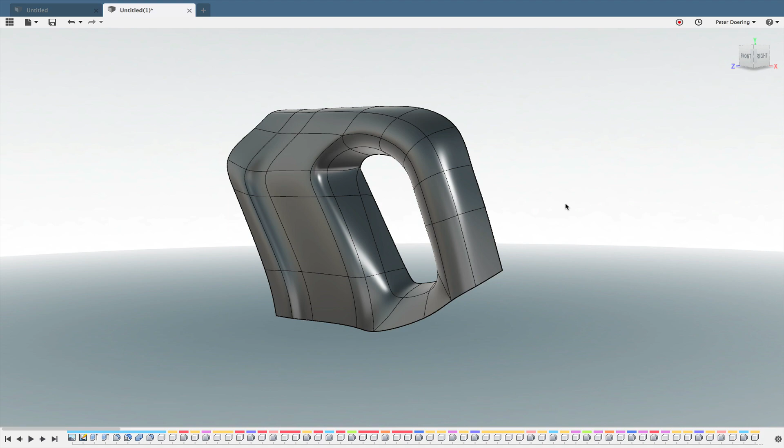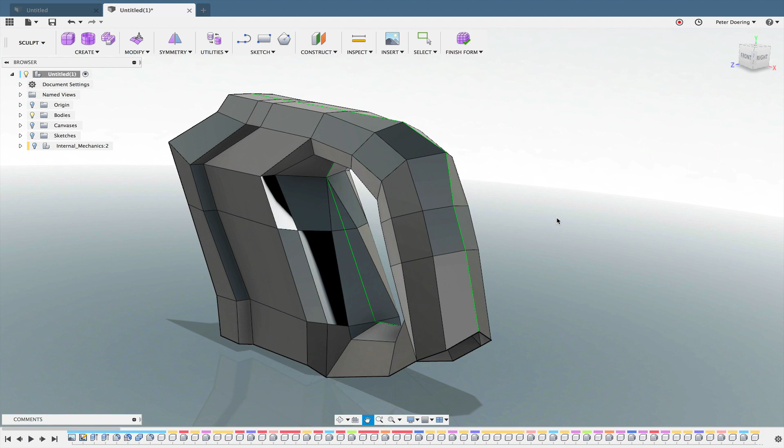The user that provided this model on the Fusion 360 forum says that he applied the mirror duplicate, and it turned all boxy. So the question is, of course, why is that? And the experienced user already knows why.

First of all, there's actually nothing wrong with it looking boxy, because it's simply a view mode. This shows you the layout of the control vertices. And when it's smooth, it shows you the surface structure it actually converts into when you finish the form.

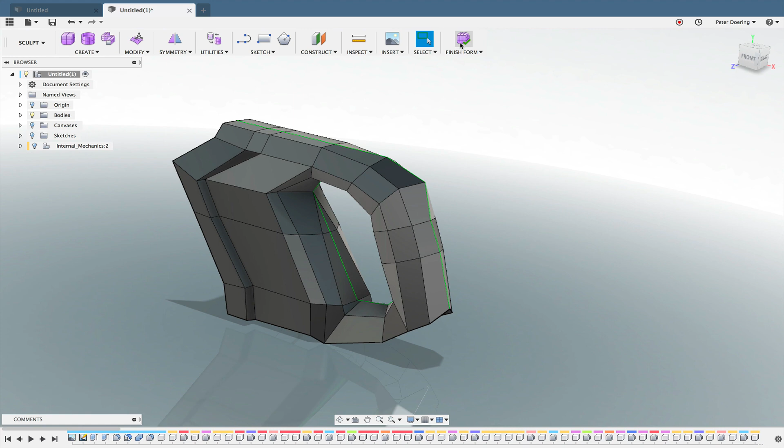But in this case, we couldn't actually finish the form because Fusion 360 would complain, as it does here. It says there's something wrong with the topology. And yes, there certainly is. So let's return and explain these view modes.

You should actually model, I'd say, at least 30% in box view mode and not in smooth view mode. This is just one way to get it. While you're modeling, usually with edit form enabled, those three view modes are also here. So while you are modifying your geometry, you can click on either of those. This is a mixed form, but we'll get to that in a moment, hopefully.

So this is in box view mode. Why is it? Let's try to switch it to smooth. It's enabled, but it doesn't do it. So the reason for that is that there is a triangle here.

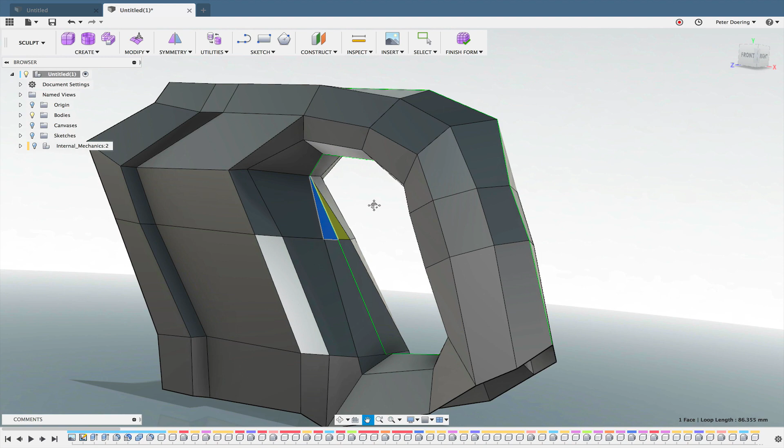If we delete it, it automatically goes back to smooth because it can convert it now. But obviously there is a hole here. So we can try to just fill that with a nice quad face, right? We don't want any triangles in our T-splines. 1, 2, 3, 4. Accept it, and there it converts into a smooth model.

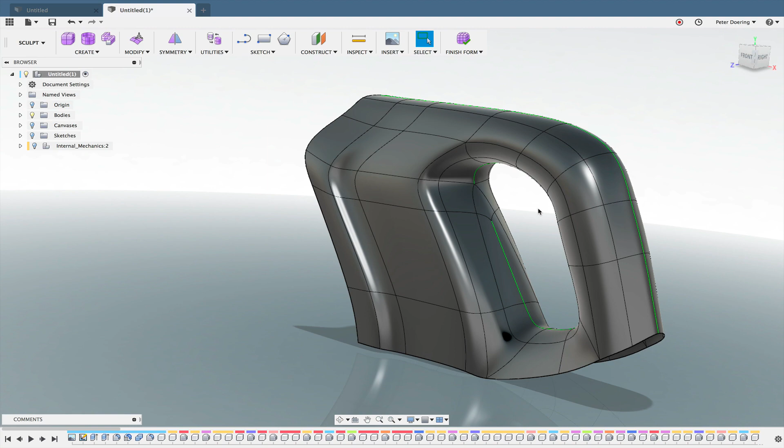But we don't really want this here. This creates usually some surface tension, and you wouldn't want that. You can actually see that if you go into the utilities here and repair body, it shows you star points. Now, there's a star point here that you can't really do anything about, but these two aren't really necessary.

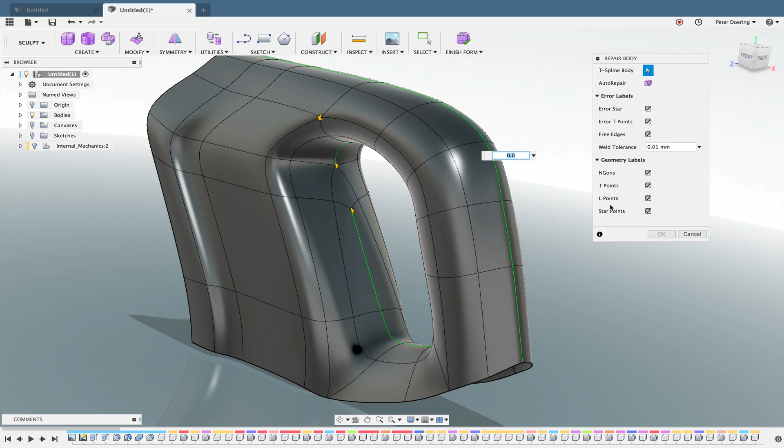You try to avoid these as much as you can. Even if we click on auto repair now, it wouldn't be able to repair anything because there's no way to do this. We have to do this manually. So let's switch back to box mode, because what I'm doing is easier to see here.

I'm simply going to delete this. And what's happening is, if we would want to make another quad face here, we'd have two vertices left over that we couldn't really merge, because then we end up with a triangle. So it's kind of this spiral form, and that's created by this constellation here of these faces.

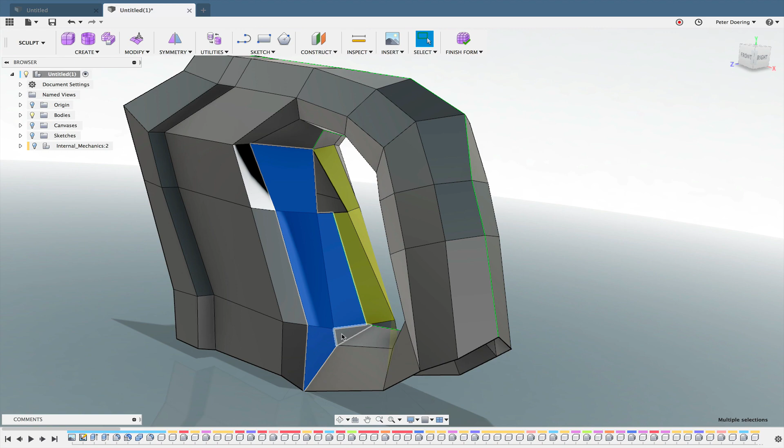So what I'm going to do is simply delete these faces, and merge or weld these two vertices. And as you can see, we have one edge here, one edge here, so we could create 1, 2 nice quad faces.

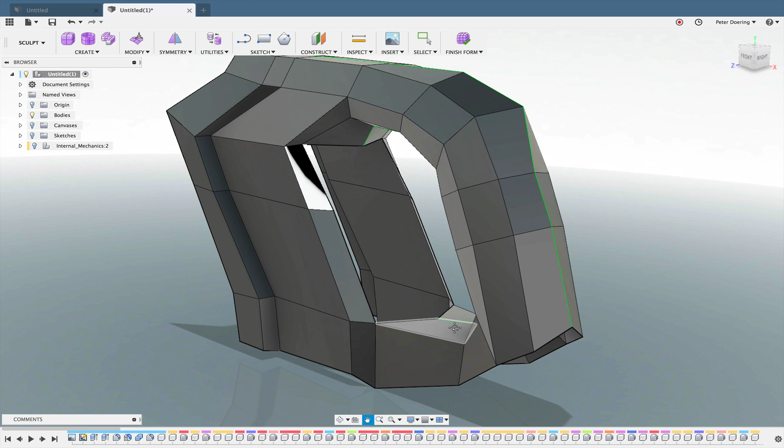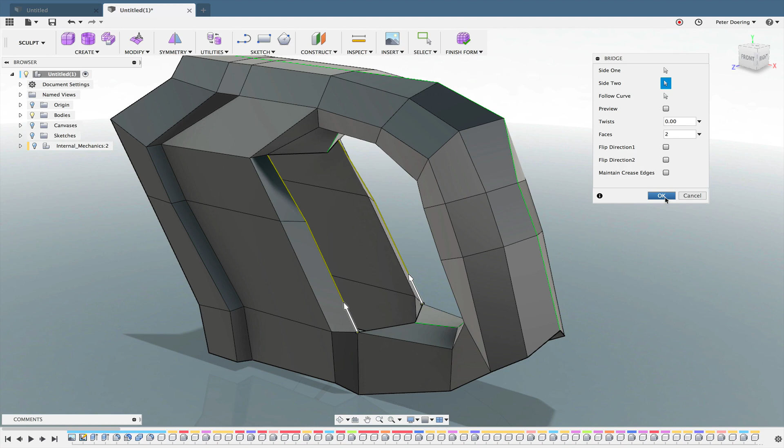So in this case, I'm going to use the bridge tool. I select my first 2 edges, or the first side, and I'm going to select the second side. I think the default is usually 3 or something else, but make it 2 faces so you have an edge in the middle, and that'll be also our symmetry line. So there are our 2 faces, and I can merge or weld these vertices together.

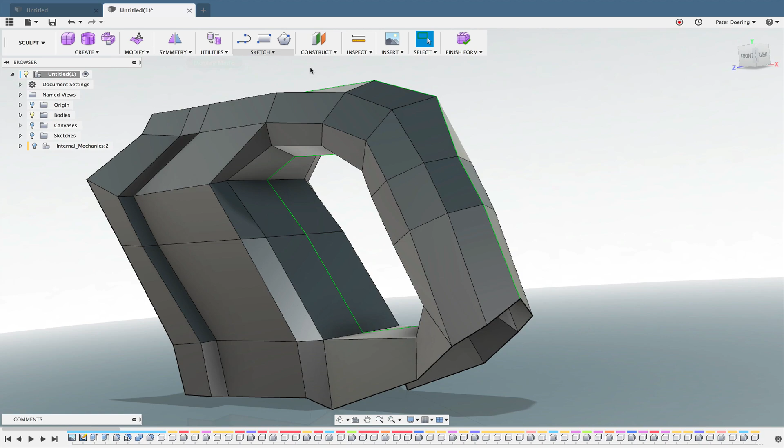All right, so now if we switch this to smooth, it looks pretty neat. Now, of course, what you want to do is make sure that these edges are nice and in line. That usually provides better geometry.

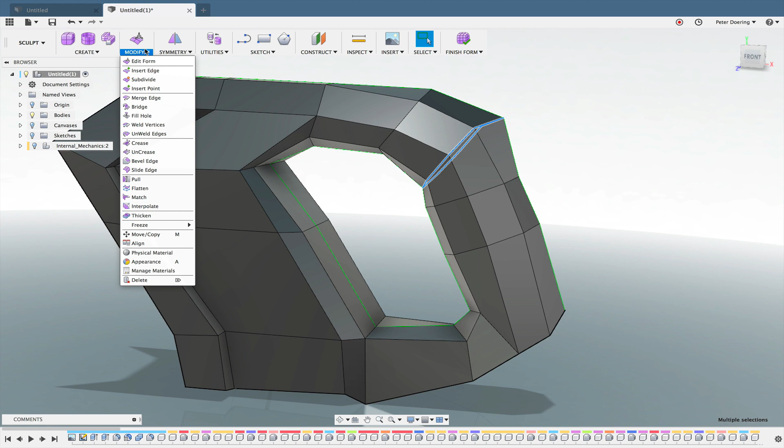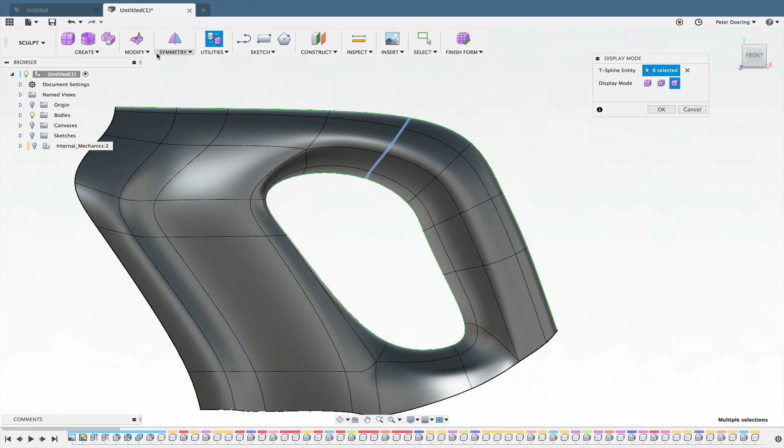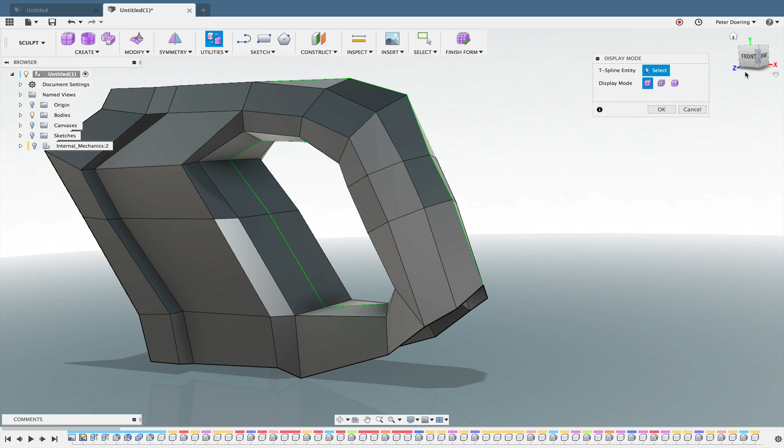So what I usually do, or often do while I model, is I simply use the Flatten tool and flatten these out. Now, when you try to do this with smooth mode enabled, you can click on flatten, and it doesn't really look like they're flat. It looks like this here, but they really aren't flat, because they are flat in box view mode. Because what this really means is it flattens the control vertices, not your smooth shape. But once you flatten your control vertices, usually that results in a smoother shape, if that makes sense.

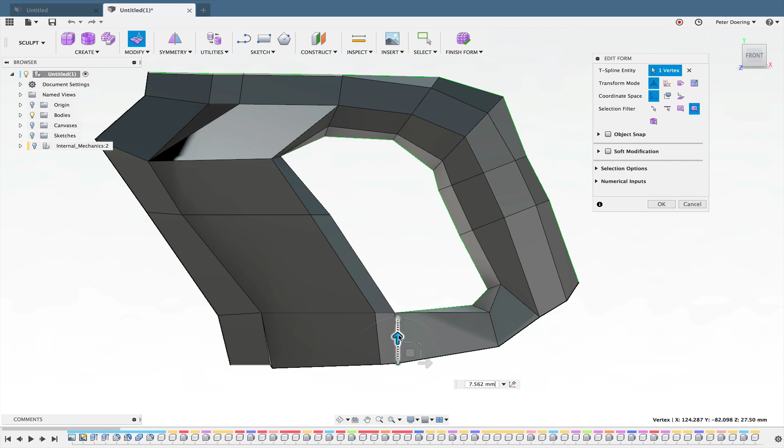All right, so this also here looks a little bit out of line. I'll pull this back in. So this is just a little bit of adjusting the shape to make it look a little bit more pleasing, hopefully. I'm going to pull this one out a tad.

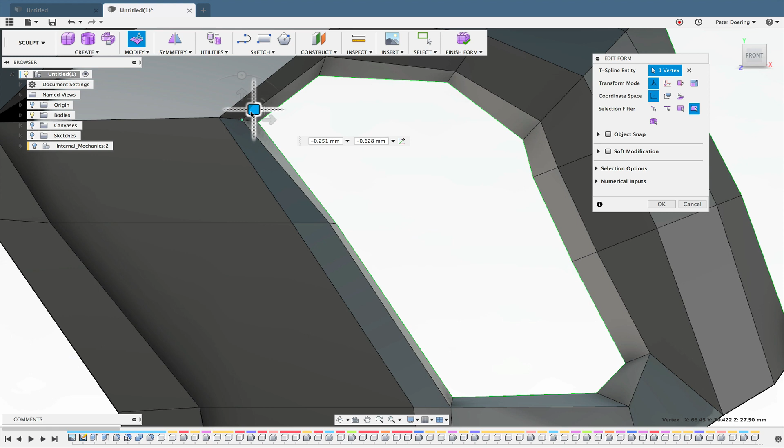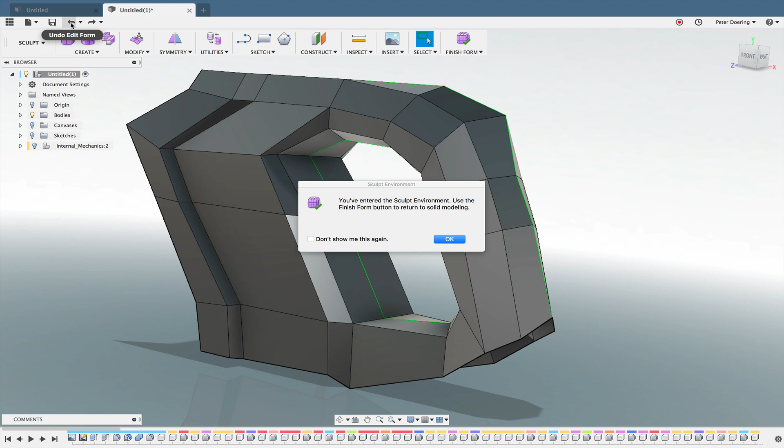And now we finish form. It converts, and we also don't have this weird looking surface here anymore. And I think I have not shown this, so let me just go back to where we had our triangle. There, if I would have finished form now, we would have had this, and that doesn't really look very clean.

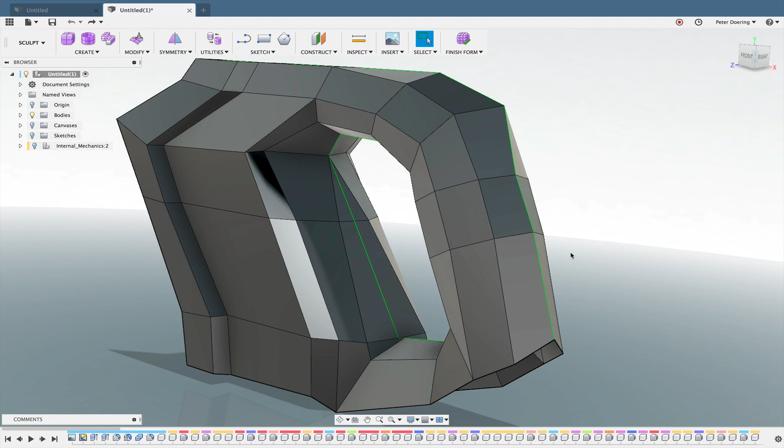So that's exactly the reason why we fix this the way we fixed it. Now it doesn't let me go back anymore, only up to a certain point. Okay, but anyway, hopefully this helps.